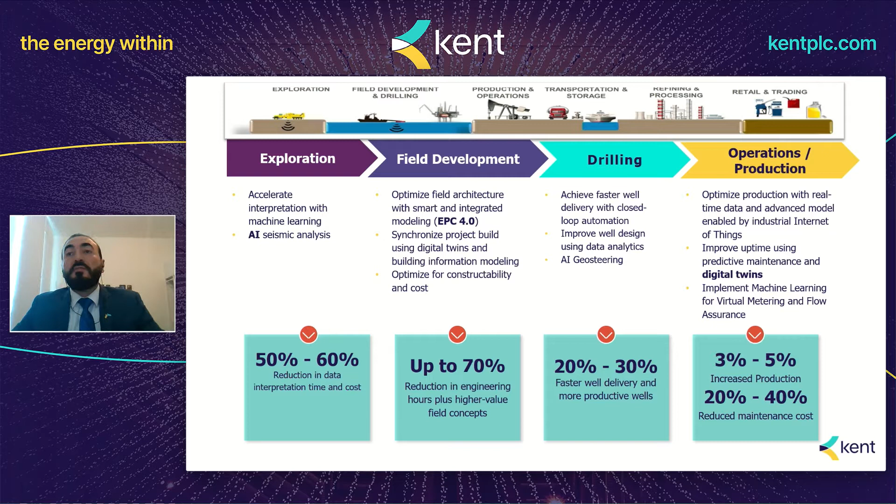Well, in the move towards digital assets, what is helping us these days more than ever are the advanced technologies to capture more data and analyze them. Talking about IoT devices, AI cameras, high power computing, machine learning, data sets, 5G, robots, satellites, and drones.

So how to unlock the real value of digital twin solutions? We know that the ultimate goal is really to achieve autonomous operations, to reduce cost and enhance safety. But how? It's really by a roadmap to be followed and milestones to be achieved. And the digital maturity levels here take place to define the integration between the physical and digital environment, the metaverse, whether it's two-way integration and fully synchronized or one-way.

A feasible approach will be to look at digital twin as a roadmap which can increase the financial benefits throughout its evolution. The digital twin roadmap must focus on creating business value at every step. So it's not about just operation, it's really the challenges that we can solve while we are implementing digital twin through better integration across various technical disciplines, organizational functions, and key players in the value chain.

So it's a life cycle ecosystem where tasks and processes are simulated and displayed in digital context for an integrated project execution and unified and predictive operations. To be noted that all project stakeholders and the operations team contribute in the development of this ecosystem. It's like a Google map, right? It's developed and consumed by the data that we publish there.

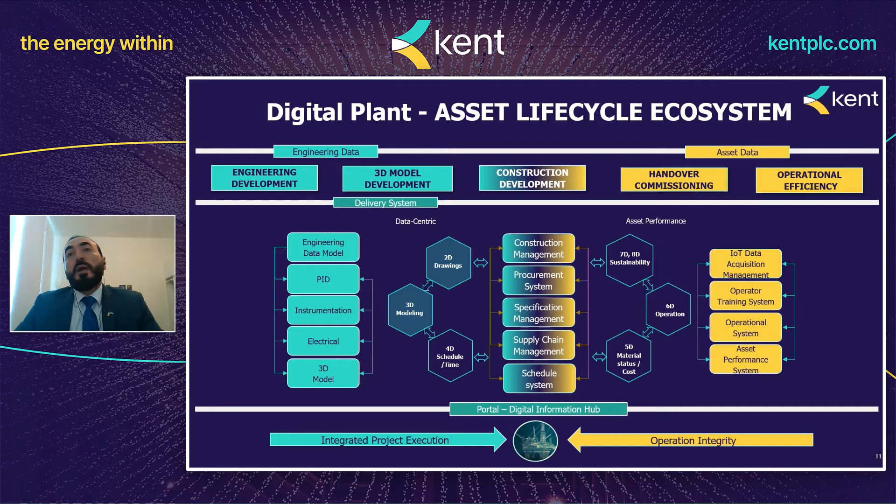So how to develop the digital plant? We always recommend to start at a very early phase to define the philosophy of operations of the digital plant, the functionalities and the goals. In this lifecycle digital thread, data is the center of information.

Engineering data increase as FEED proceeds, data are increased as engineering activities proceed, engineering data are updated to reflect field status, real-time operations data are integrated in the digital twin, engineering data maintained as operated, live streaming is a layer to monitor operations data, and operations historical data will provide analysis and insights, and can be used for unmanned and autonomous operations.

We developed the concept of 8D digital plant, where the maturity levels are defined and linked to dimensions of data of each equipment, unit, system, and the plant itself. Just consider a digital twin of a digital plant as a Google map again in your car that helps you to find the quickest or most economic route by consuming external and internal data. The digital asset helps the operator to see how to optimize production.

In addition, when the actionable insights are brought into a continuous closed loop process, it acts like a self-driving car, autonomously optimizing production. By digital plant, we are moving toward closed loop automation, a process that allows systems to recognize and respond to events without human intervention.

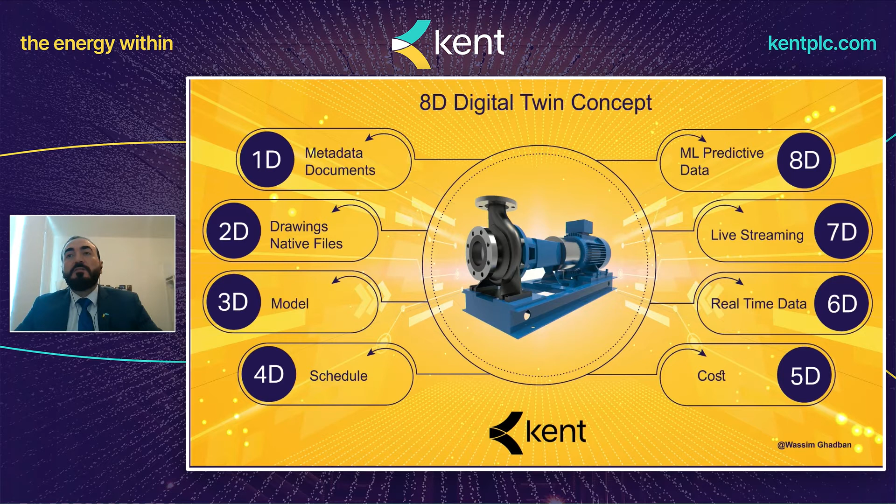risk data, installation and maintenance schedule, real-time operations data, talking about pressure, temperature, vibration, spare parts available in the warehouse, work orders, permits, spatial environment, live streaming from satellite and CCTV, and dynamic machine learning model, which is what we call the predictive profile of the equipment. So all of these will enable the single source of truth that will reduce downtime and optimize the operations process. It's always the same concept, the right information available at the right time to the right team.

The biggest mistake I see these days is considering digital twin as one solution that fits all purposes. It's been said that digital twin is a replica of a physical asset, but please don't wait till the physical asset is built to have a digital twin, because values cover project execution and operations of the asset. When we talk about project execution, especially in engineering, we talk about automation in engineering phase, immersive design review, we use VR, AR. Also, we're talking about data-centric and unified engineering.

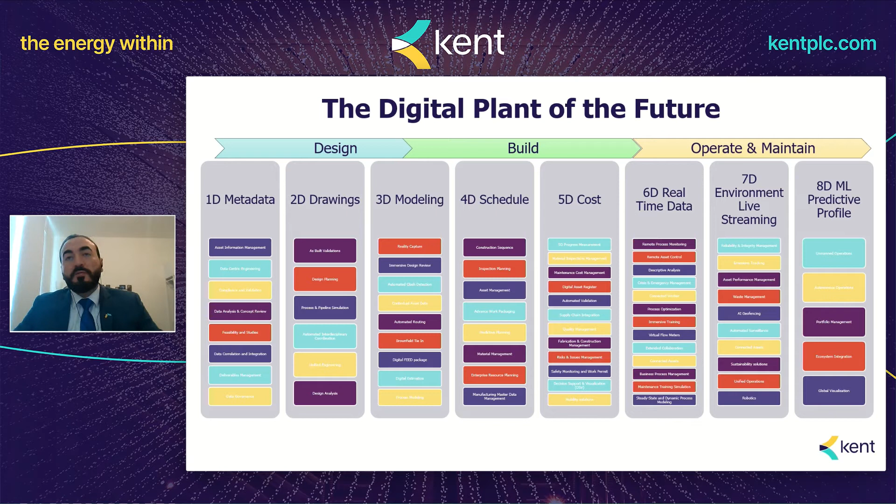For construction, it's really about optimizing construction activities, about enhancing safety. It's about real-time progress for the 5D. For operations, it's mainly about real-time solutions. It's about asset performance management and supply chain, connected workers, predictive and prescriptive analysis, integrity management, immersive training. And the list goes on as we move toward digital assets that will contribute to the development of smart cities and the global ecosystem where everything is synchronized and integrated.

Here I want to give you some use cases, real cases about digital twin implementation in different phases. This project is about design digital twin. We implemented it recently for Aramco. They adopted this concept to start the development of digital twin at a very early phase of the project life cycle, which is great because you will be able to define the class library, the asset information library, and also define the requirements from all project stakeholders.

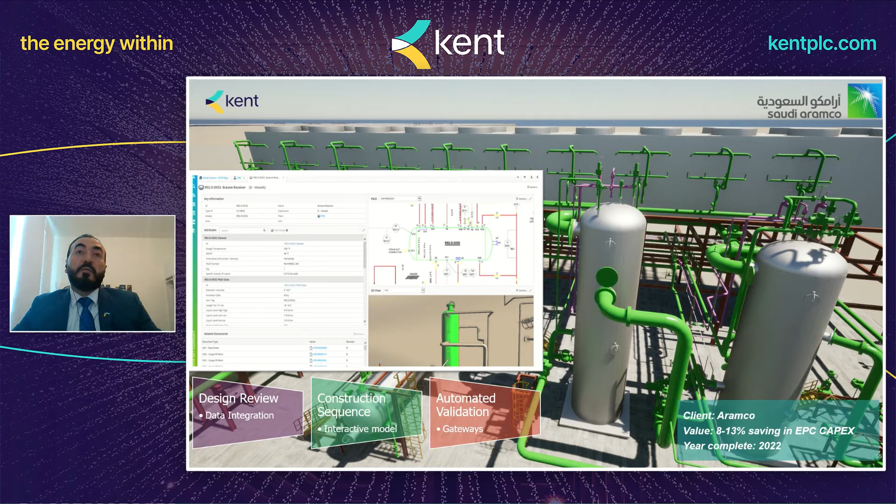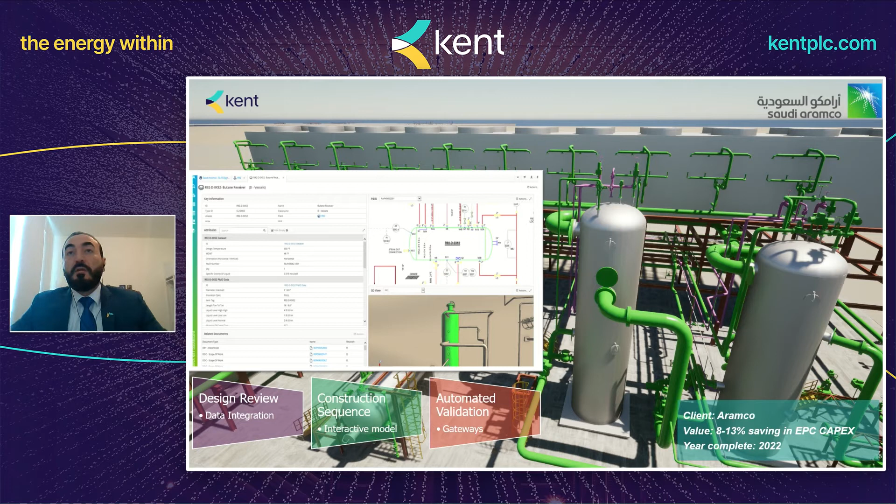Following this concept, it will really help to correlate the data from the engineering tools, from planning tools, from cost modeling, and it will also help to identify and automate the compliance with all guidelines and standards of the client. Not to forget that it will also enhance the quality and the maturity of the FEED itself. That will lead to a reduction of the capital cost of 8 to 13% of the entire project.

Another example is digital twin at the construction stage, what we call EPC 4.0. In the design stage, we call it data-centric engineering. For construction, it's more about EPC 4.0, smart construction. It's really about being able to generate dimensions of the progress in different timelines for different stakeholders. So all the data, whether it's coming from material management, construction activities, progress management, earned value, forecast to complete, can be seen in 4D and 5D and available for all stakeholders. This single source of truth definitely provides efficiency at the construction stage.

Another use case is mainly about operations and maintenance. It's a project that we delivered recently to ADNOC, called ADNOC IWC, Intelligent Wisdom Center. This is a great example of a digital twin that enables unified operations for the entire assets, for the portfolio, where you can drill down to the equipment level. In this project, we integrated many solutions, from virtual flow meter, AI geofencing, and other ERP connections and integration with historians, all under the umbrella of digital twin to give unified operation for the entire assets.

I'll give you another example with more details about this. Here, for instance, this is a digital twin. You will be able to see the work orders generated by the maintenance team, the real-time process simulation, the real-time information for each equipment, the faceplate of each equipment. You can see live streaming. You can take full control from here.

All the examples that I've shown you are new facilities, right? What we call born digital. We know in the oil and gas industry there are many aging facilities that were built 40, 50 years ago. We developed this process to be able to transform these existing assets into more connected and sustainable assets for the future. We start with evaluation of the philosophy of operation. We start the validation of the information available there, the systems, the infrastructure, and also validate as-built drawings.

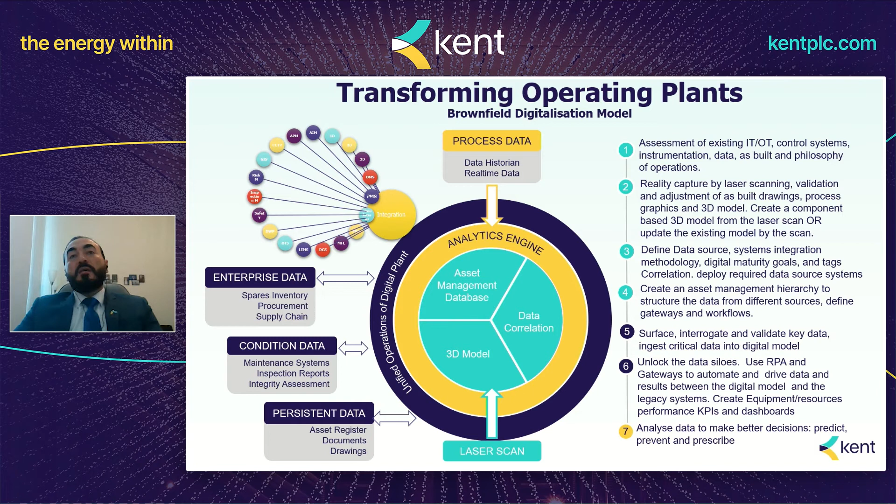Then we connect and synchronize different systems and add the gaps from additional modules. We also deploy IoT sensors to retrieve additional information that will give us insights and unified operation. So that's also a good process to transform existing assets and bring efficiency to existing facilities.